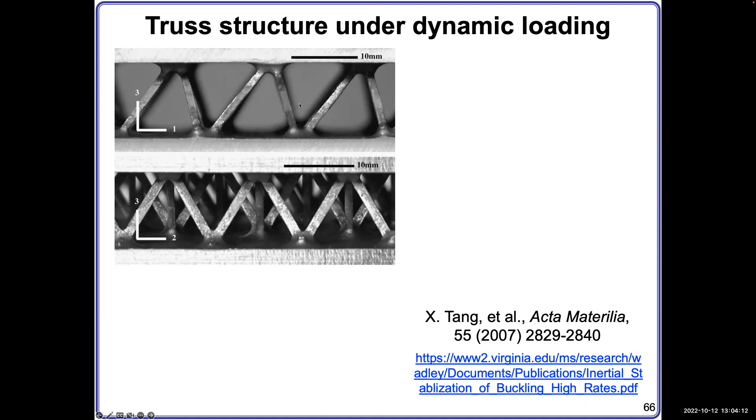So, truss structure, plane truss structure, means in 2D, mostly in 2D. Here is an example I've shown before: this is a 2D truss aluminum structure and a 3D truss structure. These structures hold two parallel plates apart from each other, and they can be used to sustain blast loading on the architecture. They can absorb energy, and also they have the advantage of low weight, saving material, while effectively resisting deformation from any coming blast loading.

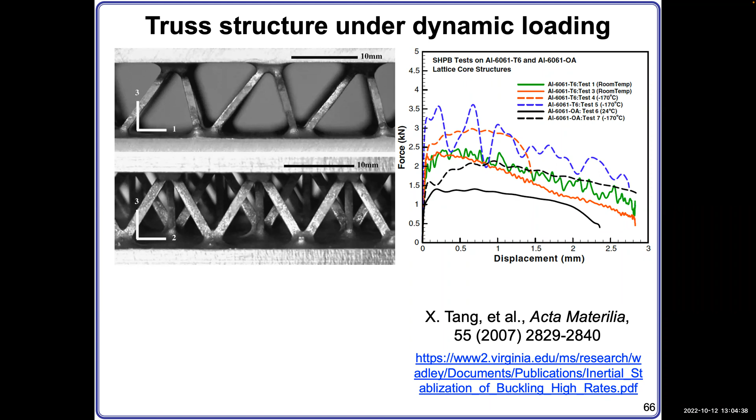So these structures can be used in many areas, like satellites, boats, ships, vehicles, and also bridges, different architectures, bridges.

Okay, so many buildings in addition to the bridge also use the truss structure, right? If you have visited Hong Kong, there are many buildings, like the bank, that are made of the truss structure, and they're transparent. They use transparent glass in the middle, and those buildings are actually very lightweight but very strong in terms of the mechanics, and they can sustain earthquakes, blasts, and high speed loading. So those are the engineering ideas that humans developed to construct all those different structures.

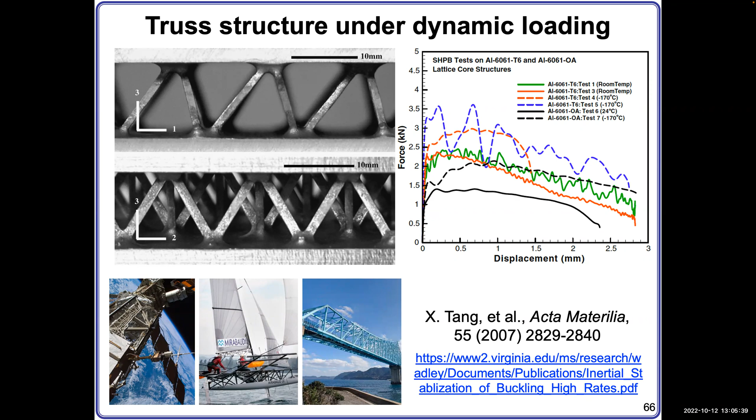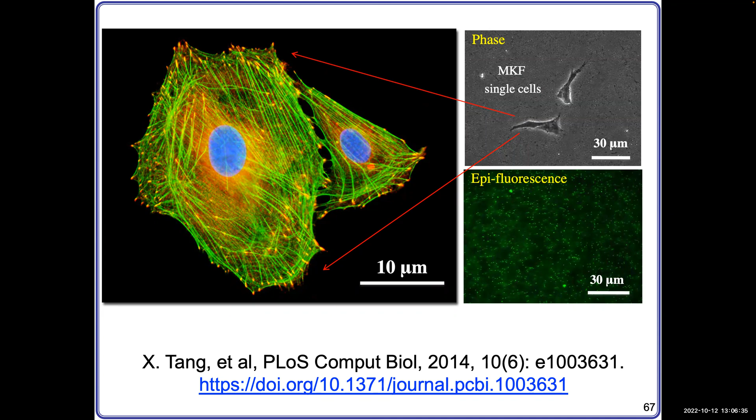like human civil life, right? So how to better understand the truss structure, how to use the finite element method to understand the mechanical state of the truss structure. What's the stress there? What's the strain there? What's the force displacement in the truss structure? That's actually the goal of our lecture.

So there are some basic differences between the 1D system we discussed and the 2D system, the truss structure, that you need to be very familiar with. Firstly, the 2D system uses a 2D element. This element has 2 degrees of freedom. They can move in the x direction and the y direction, 2 degrees of freedom or 2 displacements. So they are not necessarily only in one direction.

However, in this case we are dealing with the bar structure. Bar element, not a beam. A bar element, as we discussed previously, is a very thin, very slender structural entity. So the force the bar experiences, by definition, is along the axial direction. So when we talk about 2 degrees of freedom here, we are not saying that a single bar will experience a force in the y direction. We are saying that any single bar in this system is still subjected to axial force only.

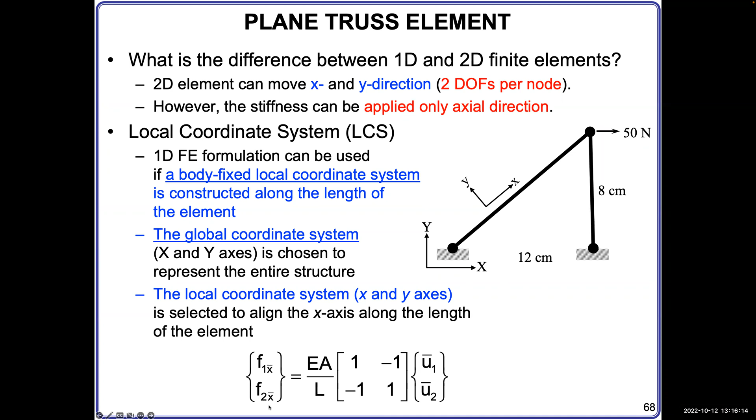So the way to do it is we add F1y bar, F2y bar, and then v1 bar, v2 bar. v means displacement along the y direction. Okay, so we expanded it to 4 by 4. This is for one bar element. Each bar has 2 nodes. Each node has 2 degrees of freedom. So altogether 4 degrees of freedom, 4 forces. So we will have this equation set. This is called the 2D element equation, and this is within the local coordinate system, as we draw here, x bar, y bar. Okay, can you guys hear me?

Yeah, very good. So this is very basic. Okay, very simple, but many students need to practice it until they can master this. Okay, so that's why we go through it slowly.

Now, once we have this equation set, we already know we can write it in the abbreviated manner, right? And then we have K bar. The top bar also means this is a local coordinate system. And this element stiffness matrix has the following property. This is the same property we discussed previously. Only difference is now it's in the local coordinate system, okay?

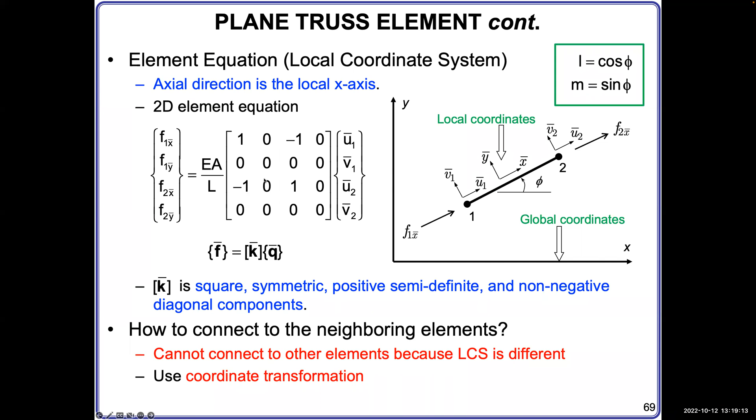Now we have this element matrix. Now we are going to convert it into the global coordinate system. So in last lecture, we already discussed that if you have one coordinate system, U and V here, let me change to the point. Okay, we have U and V here. If the coordinate system rotates counterclockwise with the angle phi, it becomes U bar and V bar.

Then any displacement within the U bar, V bar new coordinate system can also be written in the original coordinate system U and V. Okay, so the same vector in one coordinate system can also be written in another coordinate system by using the correct relationship of the angle here.

So U1 bar, V1 bar can be represented in the U1, V1 system by multiplying with this 2 by 2 matrix: cosine phi, sine phi, minus sine phi, cosine phi. We have explained why in last lecture. Using the chalk, we have drawn it on the slides, right? So you can go through that process, and then you will understand this important relationship.

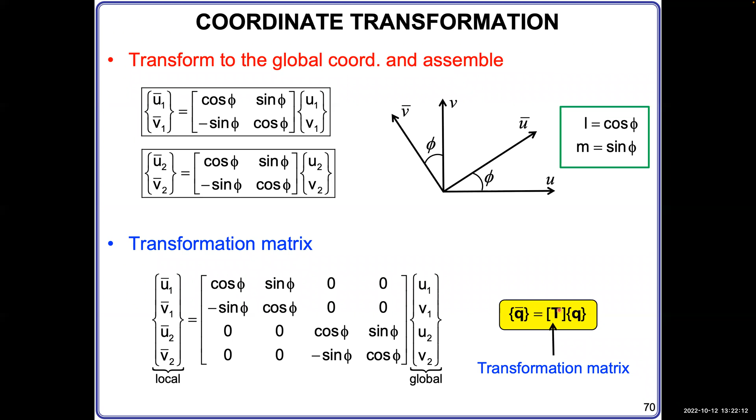So then we can assemble this matrix. Other places are 0, no multiplications, right? So we have this 4 by 4 matrix. This matrix is called a transformation matrix. And then we can write it as Q bar equals T Q. So this is the important equation.

And then we have discussed that the same transformation can be used for the force because they are all vector transformations. So you can use the same way to convert global to local and local to global. And that's why this transformation matrix T is important. And this T actually has some very unique properties.

Its inverse equals its transpose. So in this case, F bar equals T times F. We can multiply the inverse on both sides, and then T inverse times F bar equals F. We can rewrite it as F equals T inverse times F bar. And then T inverse equals T transpose. So that means F equals T transpose times F bar, right?

So you can see, by transposing this transformation matrix, you can convert degrees of freedom or forces from the global coordinate system to the local coordinate system or vice versa. That's the beautiful part. Okay, so it's very systematic. And then for any matrix that has this kind of property, its inverse equals its transpose.

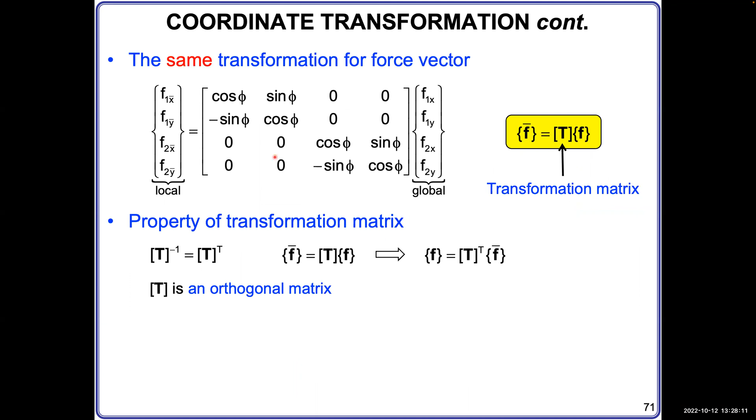That one we directly write as K, in a small character because this is the element matrix. Now this k equals T inverse times K bar times T, and T inverse is actually T transpose. It's the same thing. Now we already know what T is, and we already know K bar. K bar is this one. T we already know, this is the T. Can you guys see my screen? Yes, excellent. So we know T. Now we can calculate what k is.

You can practice the calculation. After adding the numbers in, you will get this k. Remember, this k contains both the matrix components as well as the material properties, because this is the bar element. We have EA divided by L. When you do the homework and exam problems, make sure those numbers are all included. This is important. Here, EA is the axial rigidity. And this matrix has some important properties we discussed last time.

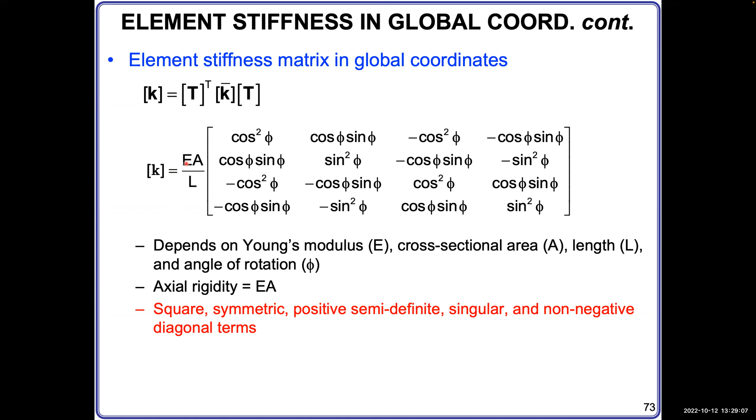Once we have this, based on the data provided in the question, you can start to add the quantitative numbers in, like the material properties and geometry properties. In the problem, they usually give you the diameter and Young's modulus. The diameter gives you the area A, and Young's modulus you can use directly. Dimensions are also given for these 2 elements: one is 8 centimeters high and 12 centimeters wide. From these 2, you know the angle theta, and from theta you can convert the local coordinate system of element 1 into its global representation.

Okay, so for element number 1, you first write the connectivity. You write N1, N2, and N3. If you write N1, N2 in this way, then the angle is here, arctangent 8 divided by 12. If you like to select another way, N1 here, N2 here, then the angle will be different, right? The angle will be from this line with respect to the horizontal, so it's larger than 180 degrees.

It's also fine. You can also do it that way. Then the theta will be different, the calculation will be different, but the final results will be the same. Okay. So to keep it consistent, we recommend you go from left to right to denote the different node numbers, as we did in the 1D spring system, right? Then it will be very difficult to make mistakes.

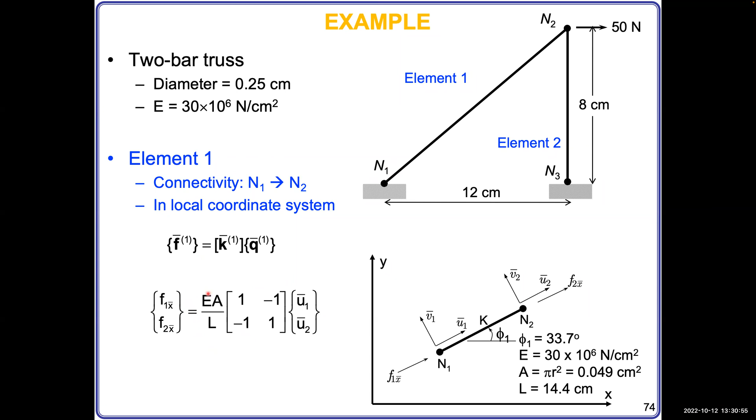Then based on this, we can construct a local coordinate system. First, construct the element matrix. Then from here you can expand it to 2 degrees of freedom for each node, and then calculate the element stiffness matrix in the global coordinate system, which is like this. Then you can add the numbers given in the problem into the equations. You will have these numbers in. We hold it here first, and this is in the global coordinate system.

Then let's repeat the same process for element number 2, get the representation in the global coordinate system, and then the 2 equations can be assembled together. So for element number 2, you have N2 here, N3 here. Following the direction N2 to N3, you have this direction, pointing downwards. The angle of this x-axis with respect to the global coordinate system is minus 90 degrees.

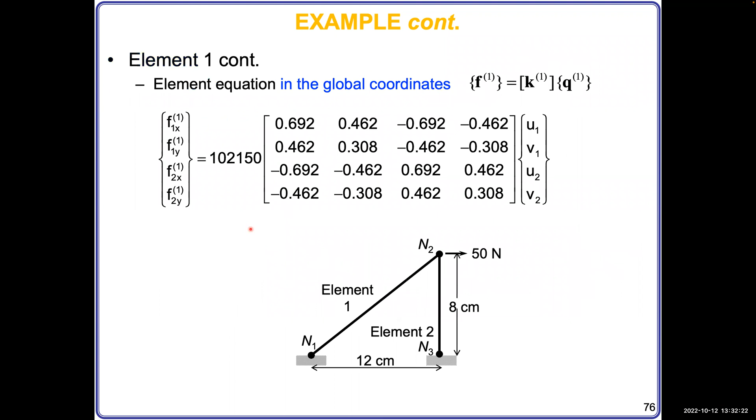Then you can construct the local coordinate system element matrix, and then you add that 90 degree angle following this equation, and you can get the K for the second element. And then you can add that together, which actually is this one. You will have these numbers for the second element after adding the sine and cosine with phi equal to minus 90 degrees.

Then you can combine the two element matrices together. The only overlapped part will be the U2, V2 location, because that is node number 2, where the two elements are combined. When we combine them, the displacement remains unchanged because it's shared by different elements, and then we add the forces together. Based on force equilibrium, all those internal forces added together equal the external force. So we can write it as the external force, capital F2x, capital F2y, right?

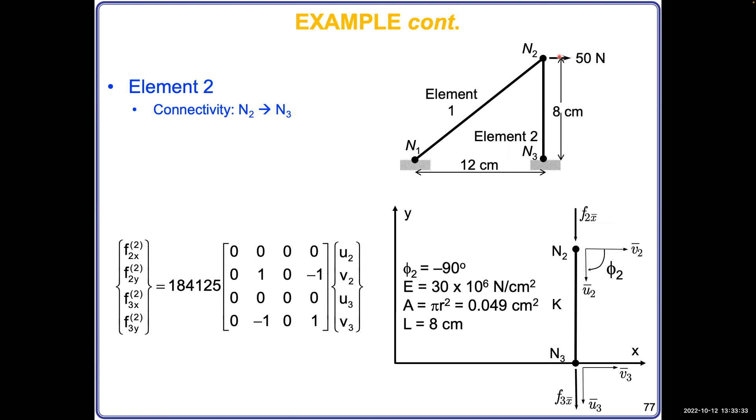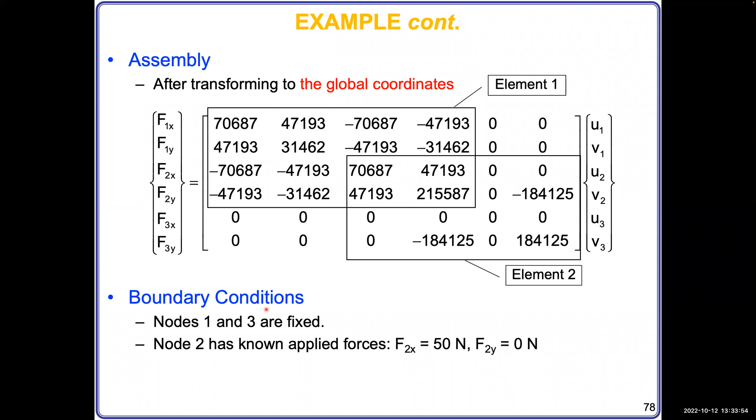Based on the boundary condition, on node number 2 we have F2x equal to 50, F2y equal to 0, the external force. So for node number 2, we have the force boundary condition; displacement is to be solved. For node number 1 and node number 3, displacements are fixed, no displacement, and the forces are unknown, to be solved. Then we can apply those boundary conditions into the equation. You can see here the unknown forces are listed, unknown displacements are listed, and all the elements in the matrix are already converted into quantitative data.

Now from here, following the same method we learned before, we strike out the rows corresponding to the unknowns on one side, and put all the unknowns on the other side that contains the matrix information. Computers can solve those matrices easily. They can quickly multiply the inverse of this matrix to both sides and solve those unknowns. The computer is more suitable to calculate those kinds of equations. You can use MATLAB to solve this.

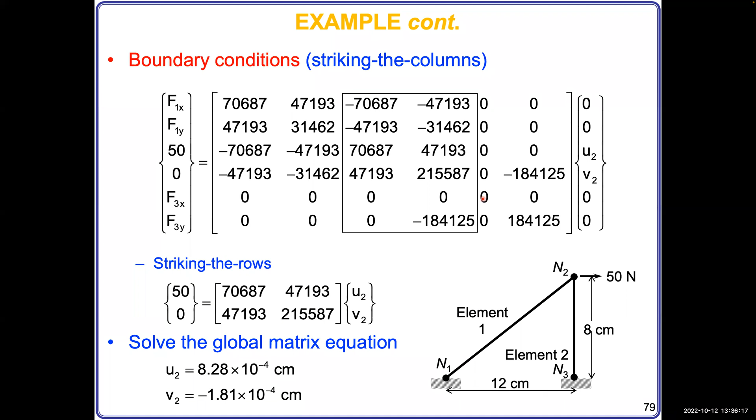Overall we have global force and global displacement all solved based on the equation we used. Now we can look into the local coordinate system. We already know that using the transformation matrix, we can convert displacement from the global coordinate system into the local coordinate system. We just discussed about it.

Now you put this number in. You now know the global displacement U2, V2; global displacement at node 1 is all 0 because this is an anchor. By multiplying this 2×4 matrix with the 4×1 matrix, you get a 2×1 vector. That 2×1 is the displacement in the local coordinate system for element number 1, which has node number 1 and node number 2.

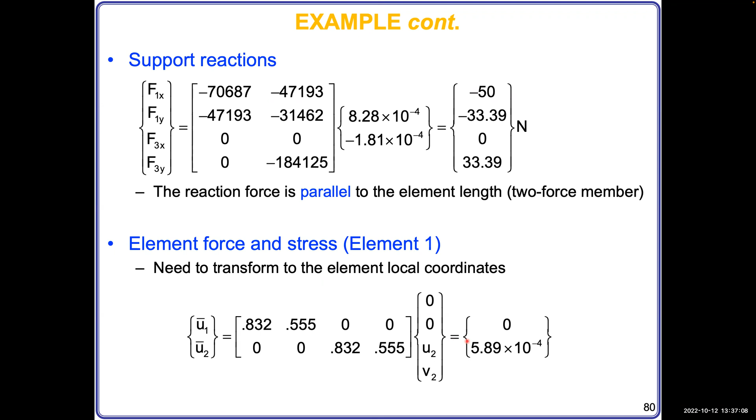Once you know displacement, we also know the material properties of that element. Then we can add that displacement into the element stiffness matrix, and we can directly calculate the force there—force applied to the two nodes, node number 1 and node number 2.

In the local coordinate system, we find force equal to minus 60.2 and positive 60.2. That's accurate because these two numbers should be in equilibrium, right? For the two nodes by itself, this is the equilibrium part. So you can see there's no force component in the local y direction, and in the x direction the two forces are equal and opposite, okay?

The force at the second node equals the element force—that's by convention, the element force. Once we know the force here, we can also calculate the stress. Stress is the force divided by the area. We know the diameter, so we know the area, so when we calculate it we get the stress there.

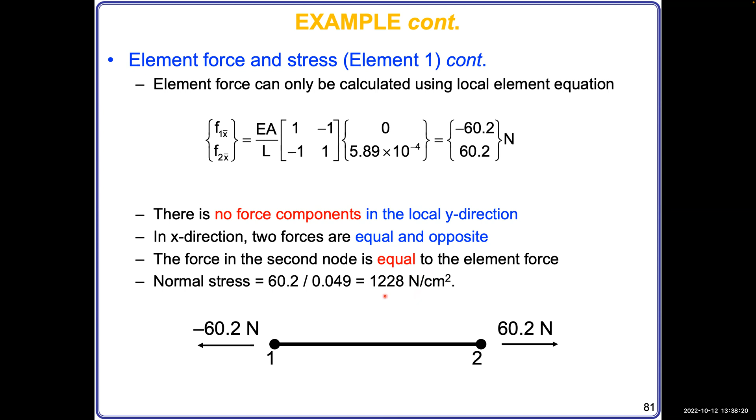So then we get the complete information in the system. From here, the element force is calculated from the displacement change. Using Hooke's law, we can calculate that. This is in the local coordinate system, because we use UJ bar and UI bar—local coordinate system—to calculate those element forces.

This element force can also be viewed in the global coordinate system. The way to view it is we calculate the force using the global displacement, but the number will be the same. The force is still there—they're still around the axial direction of the bar. It's just a different way to calculate it.

If you directly use the displacement in the local coordinate system, it's very straightforward—you use the two displacements calculated. But if you want to use the global displacement you measured, that's also fine. You just need to convert global displacement UJ, VJ into the local coordinate system by multiplying with the direction cosine. This is the same one we discussed during the transformation matrix.

So from here, UJ bar equals L·UJ plus M·VJ, and UI bar equals L·UI plus M·VI. L and M are the cosine and sine in the transformation matrix, same way. Once you know the transformation matrix, you can measure displacement in the global coordinate system, both around X and Y direction, and put that into this relationship. Then you can calculate the global force, the element force—you'll get the same results.

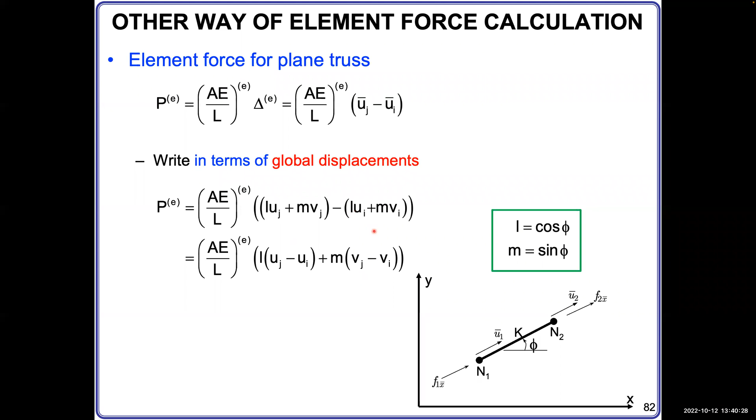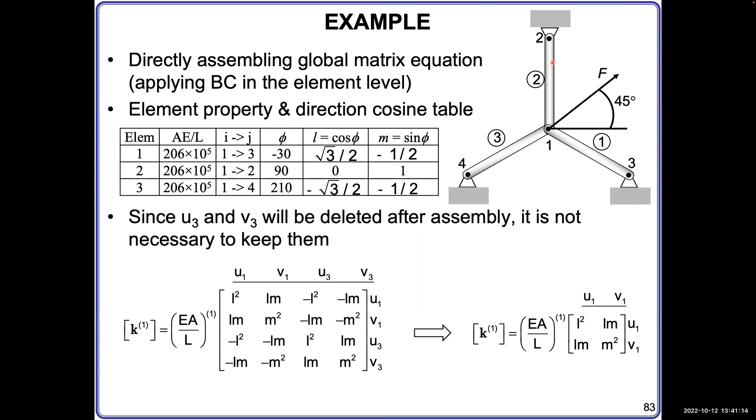So that's all, and here is one more example you can use to resolve. Now you are able to solve those 2D structures and find out their individual mechanical state. That is excellent—so you can do those examples now.

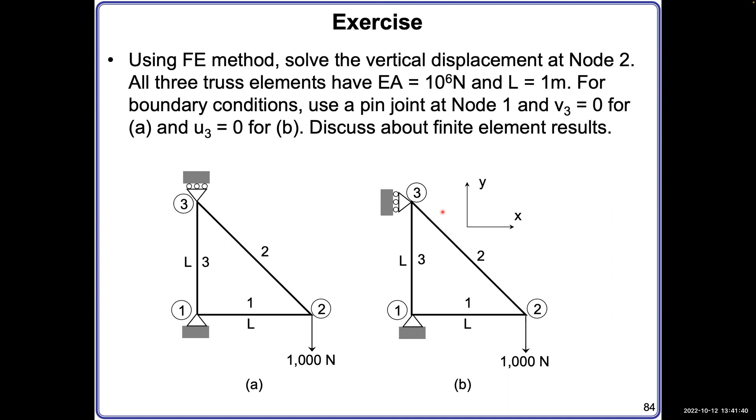Next lecture we will start to talk about 3D structures. There's architecture that uses 3D structures, but the principle is the same.